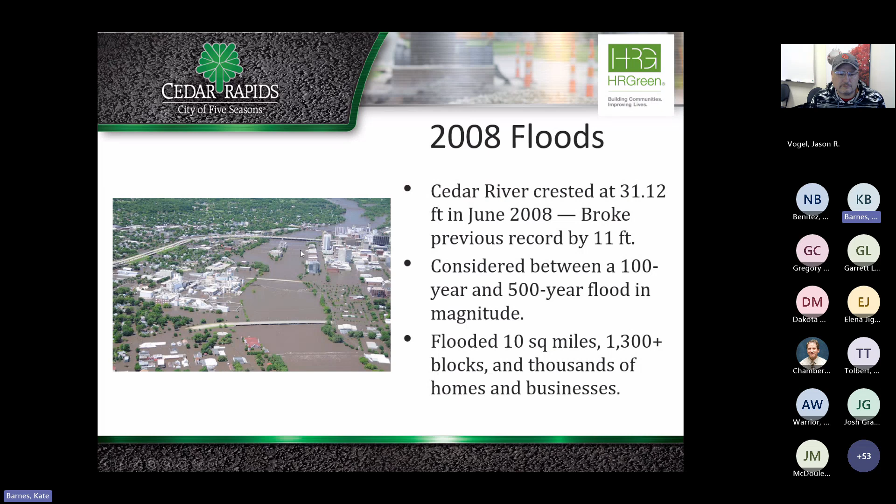It displaced anywhere from 10,000 to 18,000 residents and was declared a major federal disaster with an estimated $10 billion in damages. At the time, that was one of the nation's largest events damage-wise.

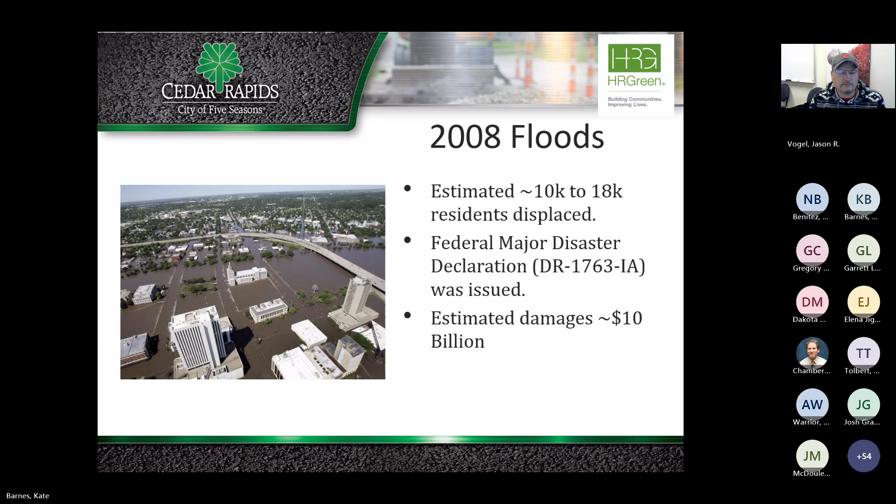This is a picture of downtown Cedar Rapids. It was completely flooded. But the city decided to move quickly, and they put together a long-term flood management strategy within just 5 months of this event happening.

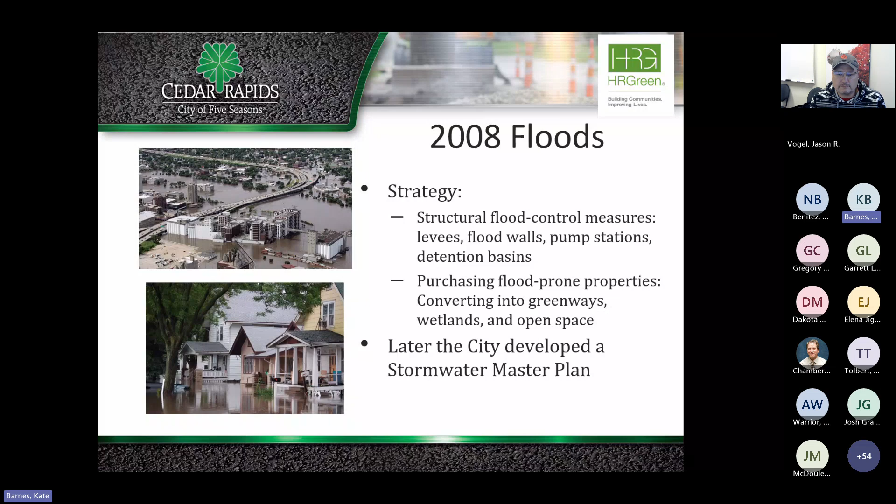Their strategy included structural flood control measures, so levees, flood walls, pump stations, and detention basins, but also converting flood-prone properties to greenways, wetlands, and open space. The city also developed the Stormwater Master Plan because of these floods.

This Stormwater Master Plan was actually done by a different firm called HDR, and they modeled the entire city of Cedar Rapids hydraulically with a 1D, 2D model.

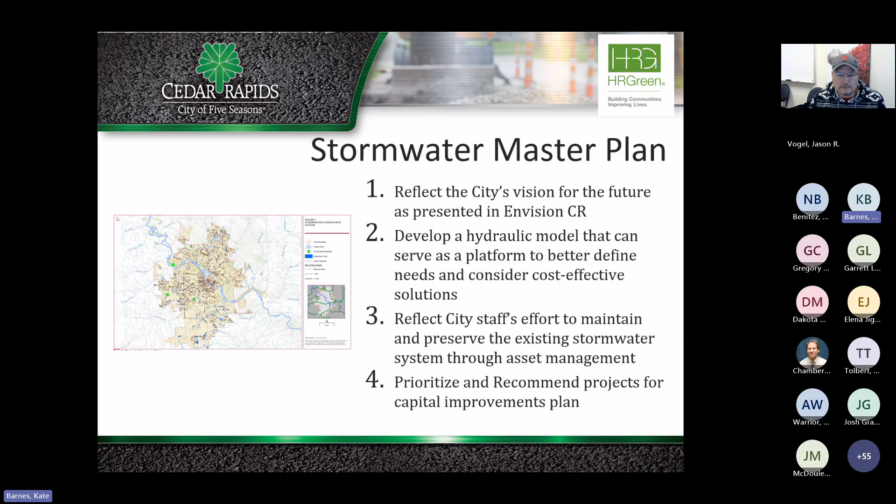This is a screen grab of the modeling extents, but what the Stormwater Master Plan set out to do was reflect the city's vision for the future as presented in a document called Envision CR, develop a hydraulic model that served as a platform to better define needs and consider cost-effective solutions, reflect the city staff's effort to maintain and preserve the existing stormwater system through asset management, and then prioritize and recommend projects for capital improvement plans.

Also, the study aimed to identify financial needs and potential funding to close the gap between revenue and needs, consider potential policy solutions to address fundamental issues that contribute to current flooding problems, and establish the foundation for annual updates to expand and improve upon the initial plan.

So they really did a lot of work modeling the whole city and determining areas where upgrades were needed and prioritizing those upgrades based on available funding.

This image is actually the watershed where the project that we're going to talk about today is. It's right here, on the west side of the Cedar River.

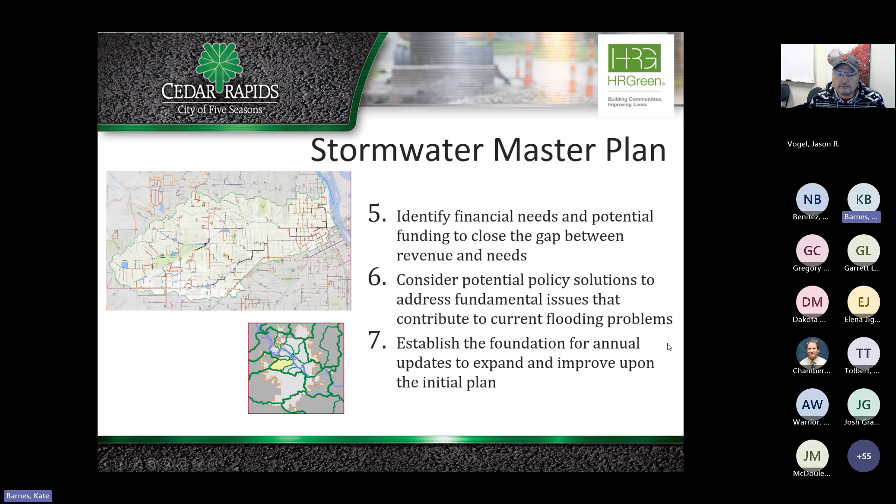Another part of what came of these floods was a flood control system. The city is still actively designing and constructing their flood control system. The green are areas of the levee that are complete. The red is areas where active construction is taking place, and the blue are future construction areas.

You'll notice that the top of this page, which is actually the east side of the river, is more complete than the west side of the river. That's because this is the downtown area of Cedar Rapids, and this side of the river received federal funding, so they needed to complete that work quicker than the west side. But the city does plan to do both sides of the river; they just needed to complete the east side first.

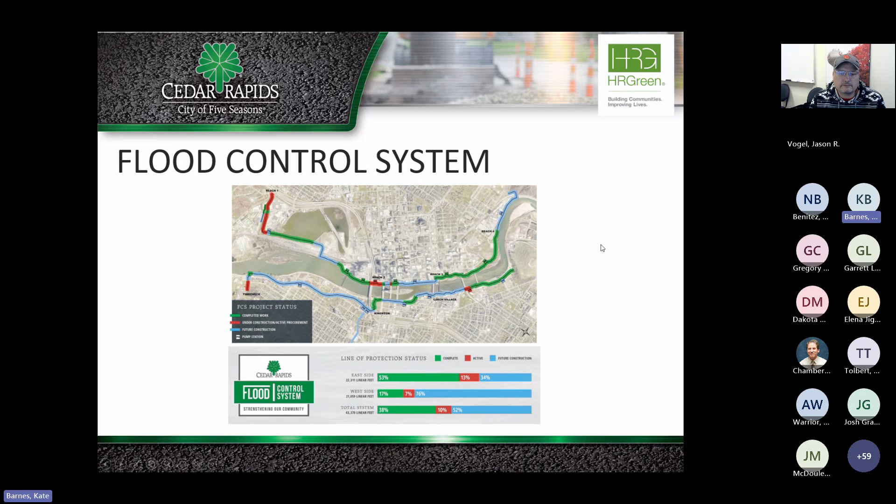So now I'll talk a little bit about where the project is located. This is along an area called the Vinton Ditch. Along with the 2008 floods, record 2014 flood events happened.

Along the Vinton Ditch, and that really established a need to kind of get this project kicked off. So the city put together plans for a basin along E Avenue, and they called out their city stormwater master plan.

There was a lot of discussion about traditional versus, as we call it here in Iowa, the unified sizing criteria, for stormwater detention. The E Avenue basin approach was they wanted to implement both water quality and quantity into the project.

Eventually this area will be protected by a levee, so there will need to be a pump station for flood events to get this water out from the drainage area to the Cedar River.

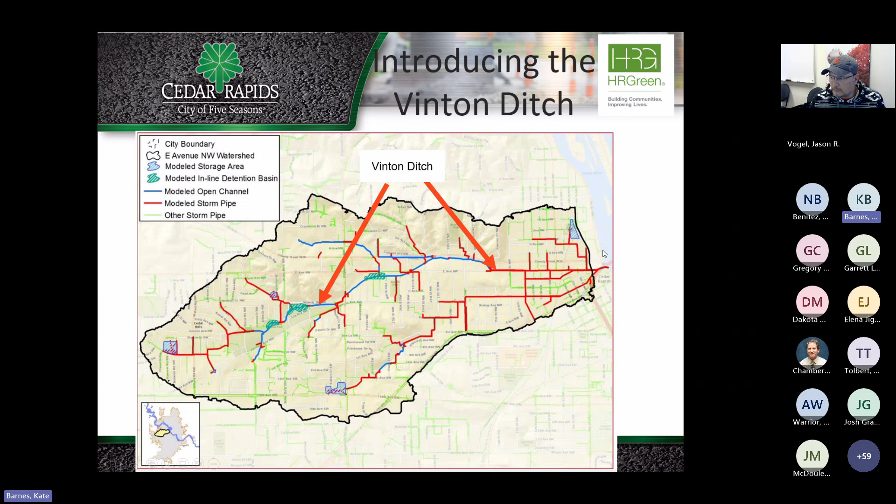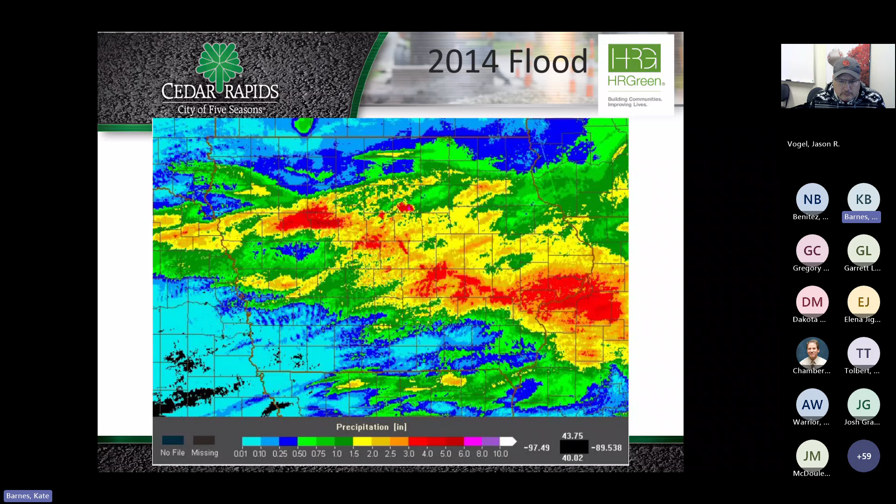Here is the 2014 event that also happened. We're right here. So not only did we just have the 2008 floods, but we also had the 2014 floods, and around the project there was significant flooding in the neighborhood.

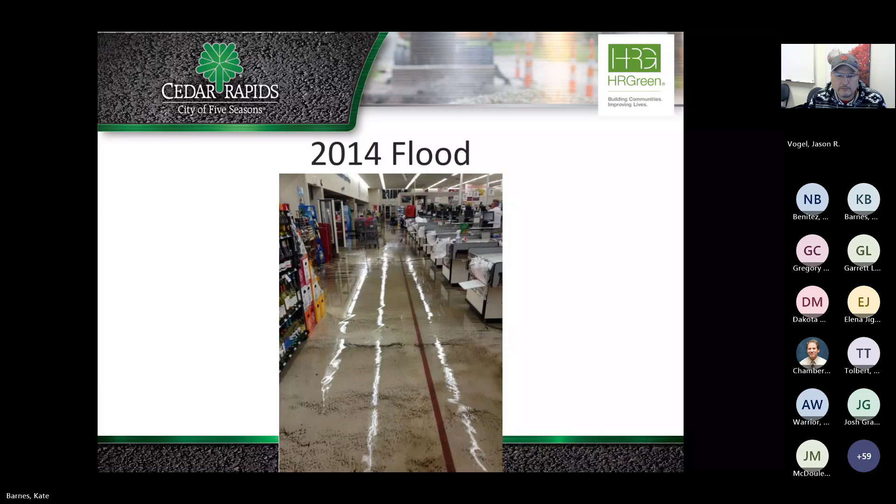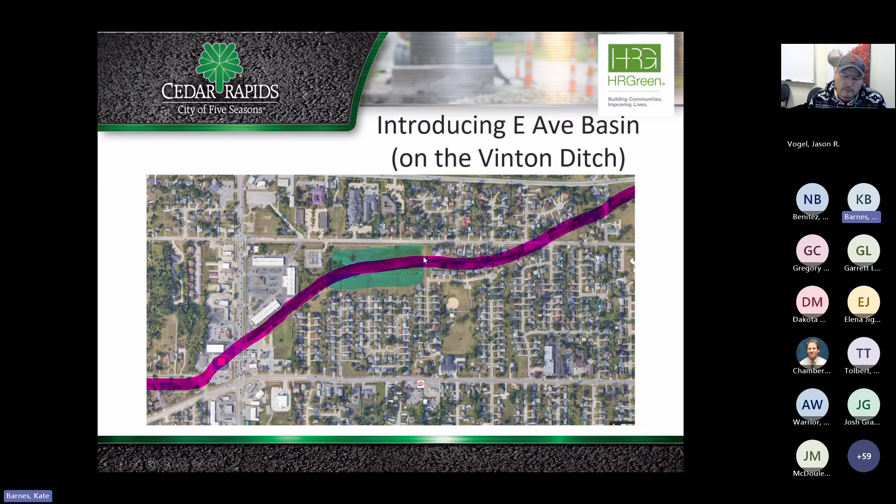Our project site is along the Vinton Ditch, and what we wanted to do was expand upon the idea of just traditional detention to help reduce some of those flows. So these are some pictures of the existing basin.

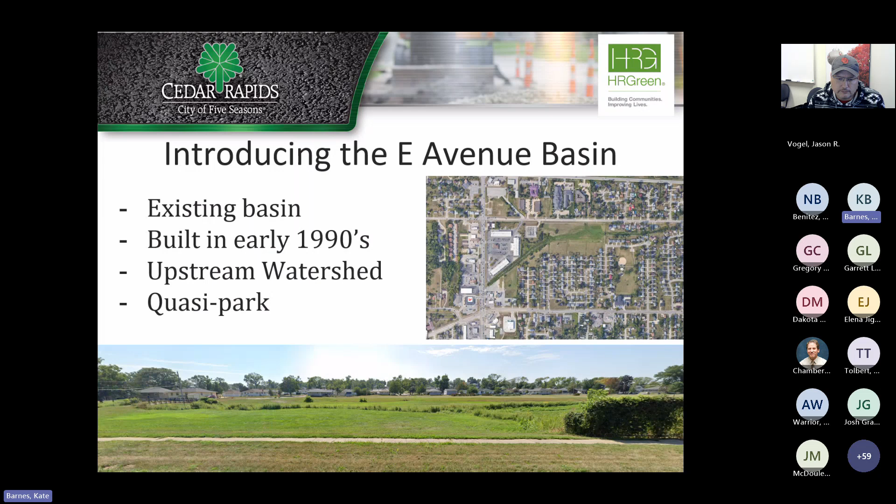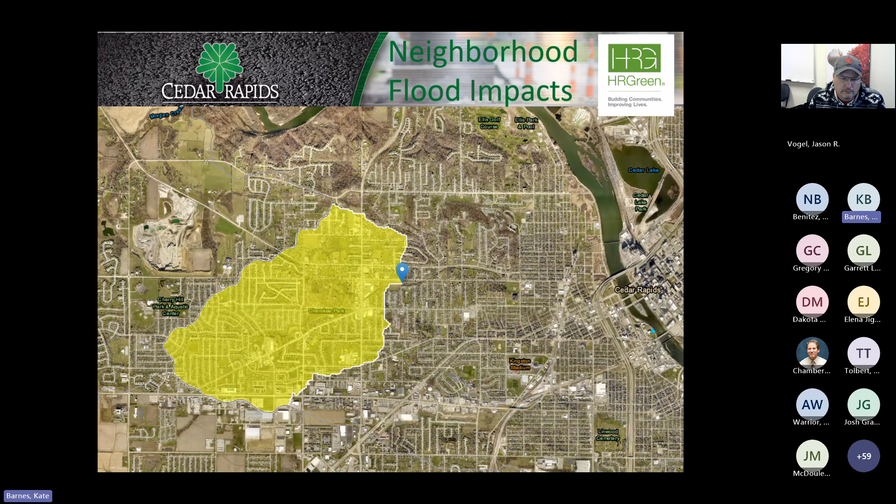You'll see essentially just a channel. It was built in the early 1990s, and it serves the upstream watershed, and also somewhat serves as a park to local residents. There's not really anything but an open grass area and a sidewalk surrounding it, so it's not like a traditional park, just a park space. The watershed is about half of the area I showed previously from the Stormwater Management Plan. It's also located in a FEMA flood zone and floodway.

In the Stormwater Management Plan, what was really being highlighted was where are places in the watershed that we can put detention and try to reduce flows going to the Cedar River, because what we want to do is decrease the size of the pumps needed for any sort of interior drainage during flood stage. So they called out the area: let's put a basin along E Avenue, and we'll use that to decrease flows.

When we talk about different types of detention, traditionally we're looking at just the 100-year event, but Iowa recently, within the past 10 years, adopted what they call the unified sizing criteria. So we're looking at basically a wide range of storms, and we want to treat all of those storms because we get different benefits from treating the different storms.

The smallest of the storms we call the recharge volume, or recharge storm. These would be rain events that are small, that we want to infiltrate everything back into the ground. Our water quality event - I'm not sure how this works for all the states in the Great Plains, but at least for Iowa, we try to treat the 1.25-inch storm, and this captures about 90% of all storms that happen in Iowa.

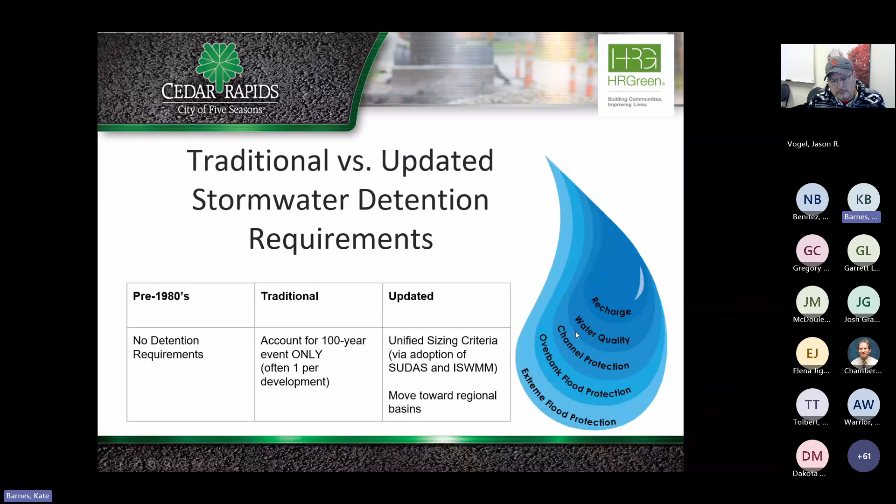So if we look at traditional versus the updated stormwater detention requirements - this is a screen grab of an area in Iowa that was developed prior to the 1980s, where there were no detention requirements. And then if you look at more current developed areas, we have a lot more detention, but all of these detention areas are sized only for the 100-year storm, reducing that down to what's called the pre-developed 5-year event. So basically we tried to reduce our 100-year proposed flows down to the pre-development 5-year.

And beyond that, the unified sizing criteria - which we don't really have screen grabs of recently developed areas for - would be detaining even more than just that 100-year event.

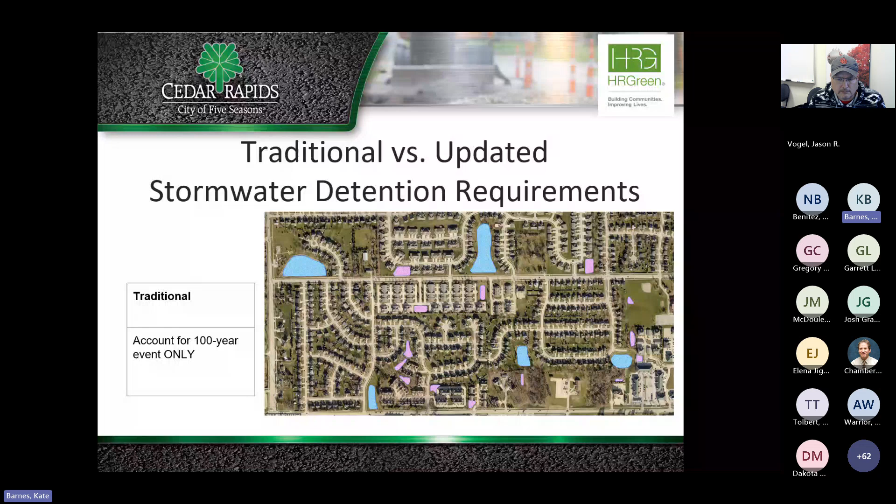This illustrates what the outfall structure for the unified sizing criteria might look like. We have a multi-stage outlet structure - it basically has a treatment level, and then the water quality, channel protection, overbank, and extreme flood events have different outlets that are sized appropriately so the different rainfall events can travel through the outlet structure.

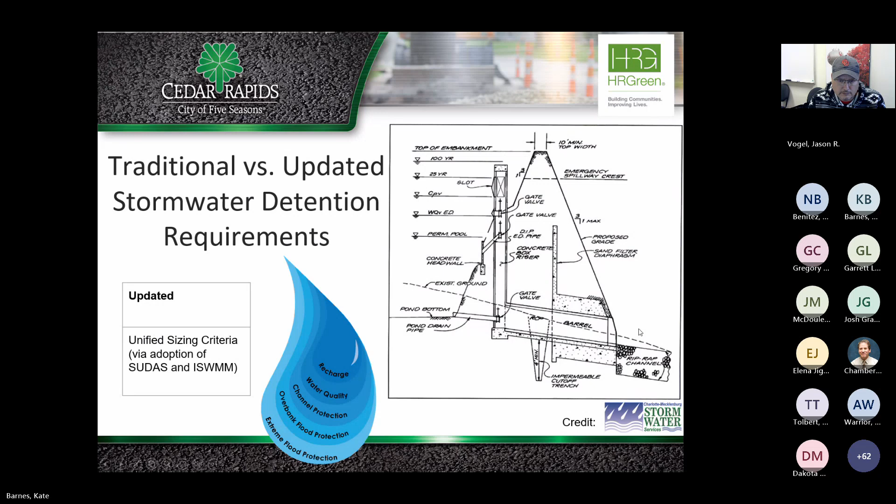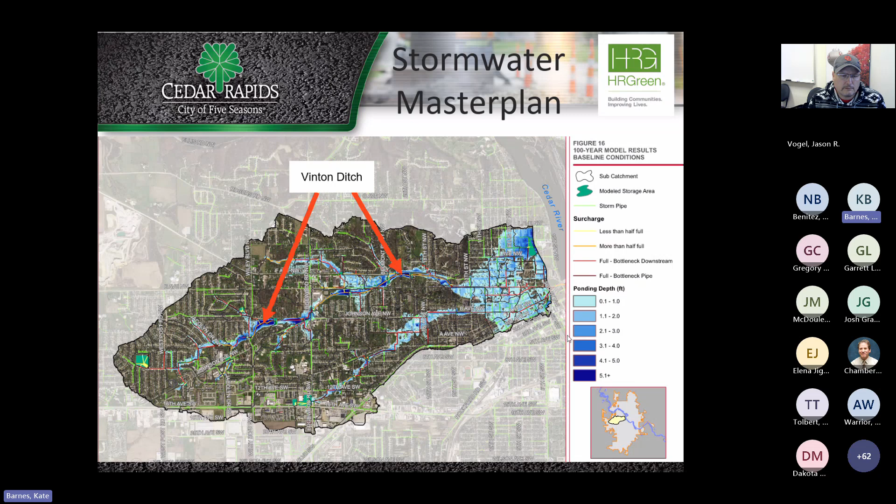And how this applies to the Vinton Ditch: the area where our project is located is right here in the middle of the watershed. When the Stormwater Management Plan was developed, the idea was let's just try to do traditional detention and hold back as much water as we can to prevent water from inundating during flood events. This image shows what the current system would look like if there was an event where pumping would happen - all of this area is inundated.

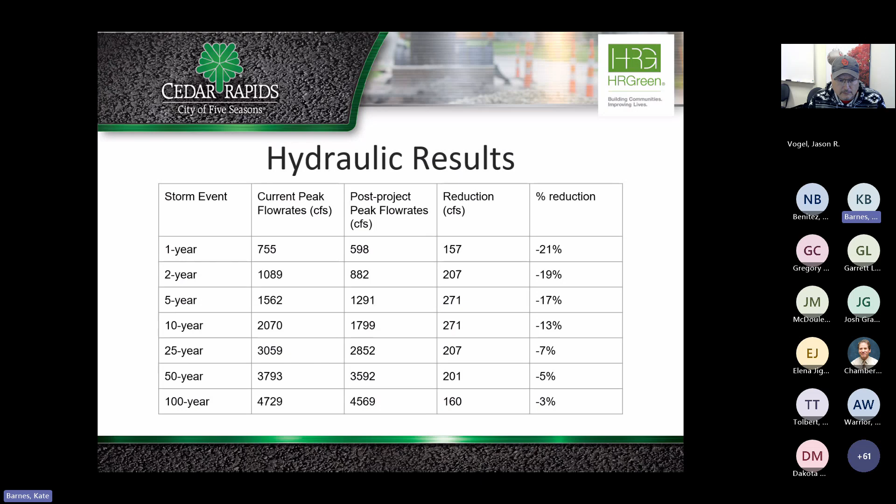What we looked at is, could we update this design to a different design that incorporated treating some of those lower storms, but also still reducing peak flows? So we created a hydraulic model of our own to show if we modified the design from traditional detention to one that incorporated water quality features, could we still get peak flow reductions similar to or more than what was outlined in the Stormwater Master Plan? Here's a quick chart of the flows we were able to obtain with our modeling.

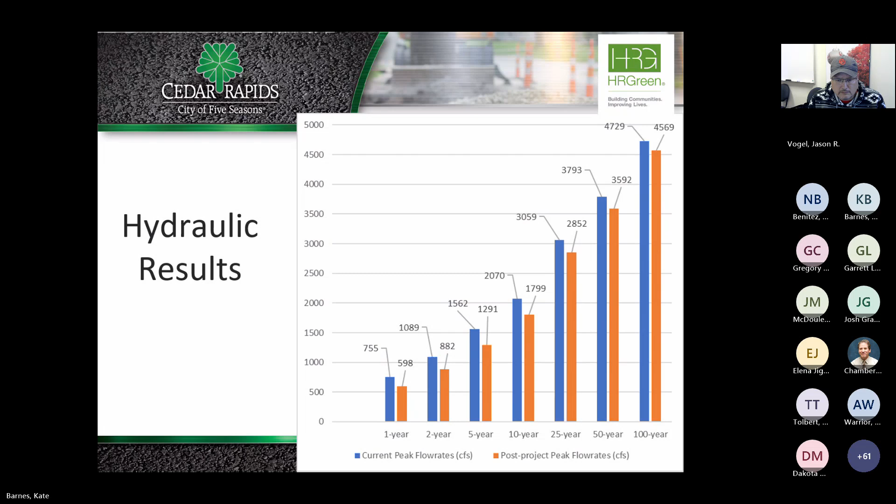When we went into the design of the site, we were looking at local flood mitigation. We want to have less of an impact on the neighborhood. We also want to assist with the city's flood control system and make necessary civil engineering improvements to the water main and sanitary sewer while we were in the area, and then also improve the transportation in the area and provide the ecological uplift and water quality uplift, as well as provide some connection to local trails.

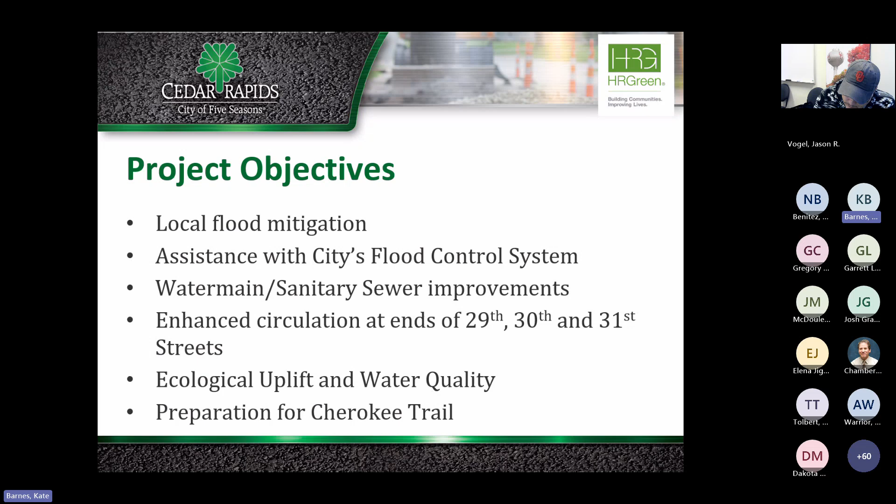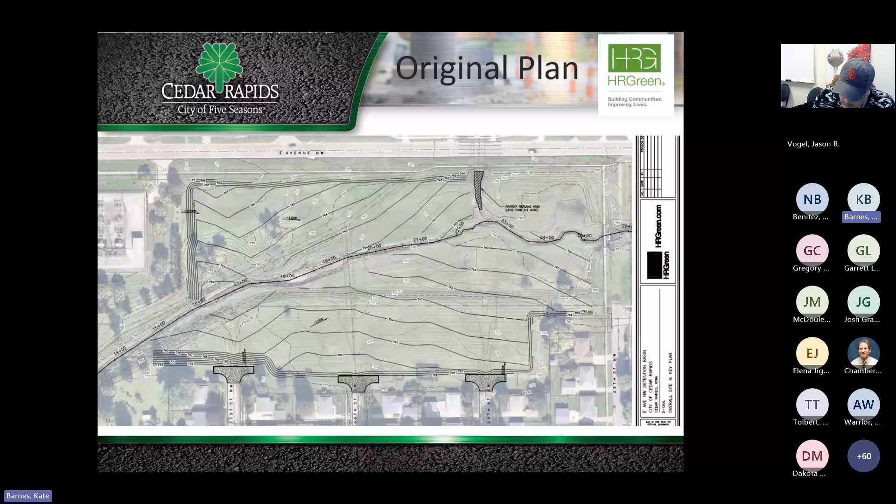This was the original design for the basin, just purely based on the Stormwater Management Plan. We're going to do some grading. We're going to try to open up the area and provide as much detention as we can.

This is the final design of what our site looked like. We ended up incorporating 5 oxbow wetlands into the detention basin. Our original footprint was in this area, but we created several low spots for detention of those lower storm events, and also pocket wetlands that will remain beyond just the storm event.

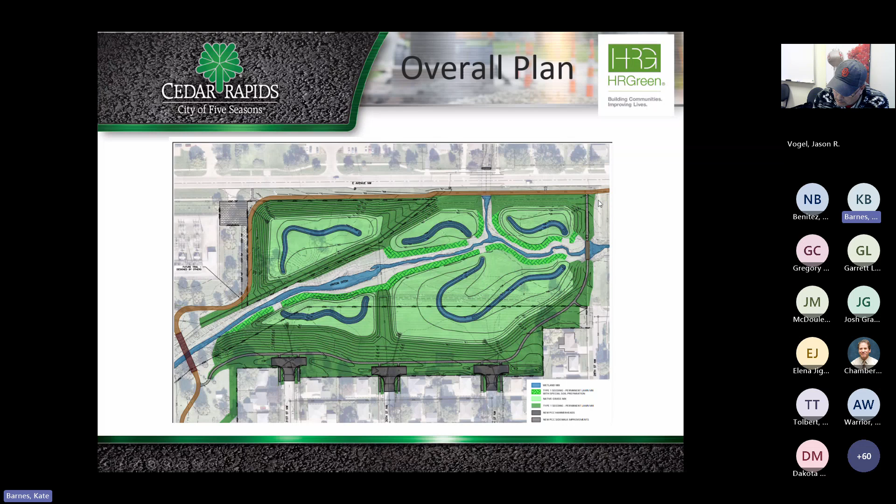Our site also included connection to this proposed future Cherokee Trail and additional sidewalk around the whole park area, as well as hammerhead turnarounds to make the neighborhood safer for emergency management, and modifications to the trail bridge weir so we could control some of the flows leaving the site.

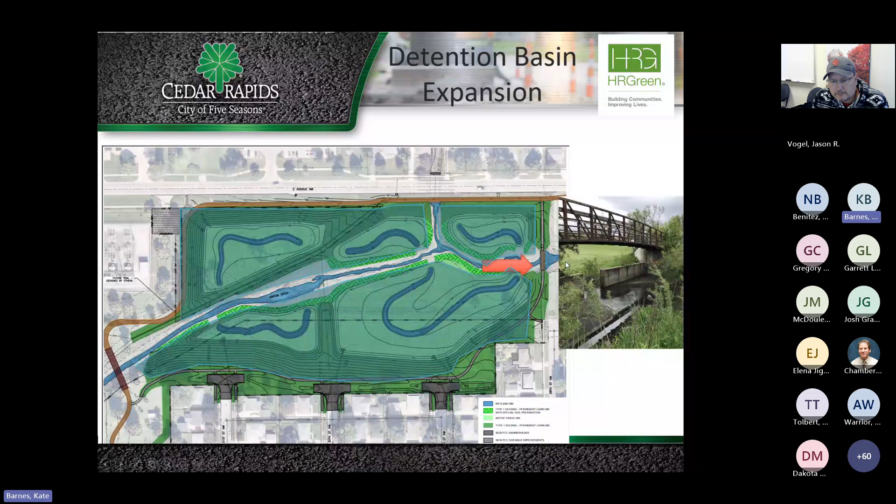So this is the existing weir that we have on site, and this was a lot of our modeling was determining how could we model and change this weir to maximize some of the potential for detention on site.

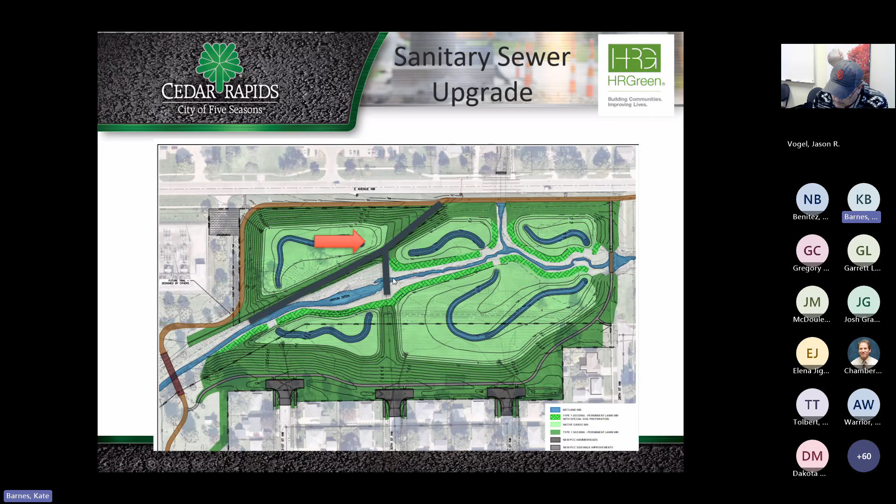We also had improvements to the sanitary sewer system running through the site, as well as improvements to the water main, that's what I discussed previously. We put in a trail.

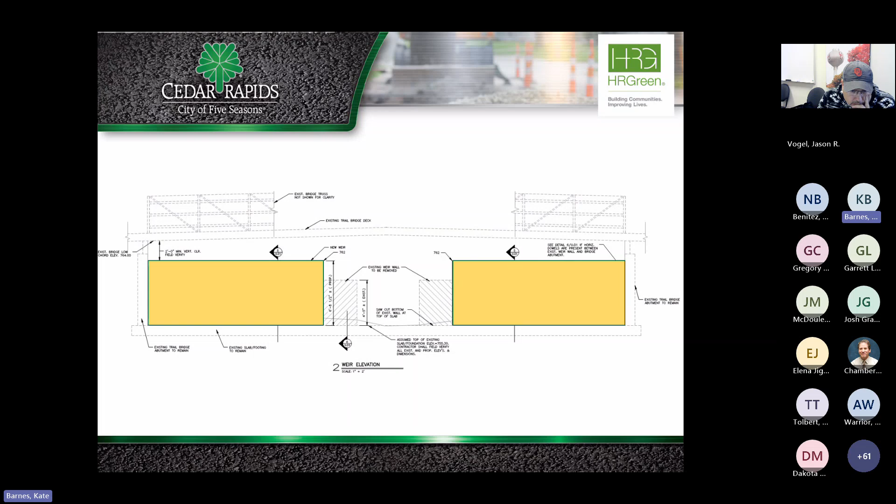And what we ended up coming up with was a wider weir with a little bit higher of a weir detention storage volume.

So the oxbows themselves really cut into the existing grade and provide a lot of additional storage, but with these oxbow flow paths that provide wetland habitat.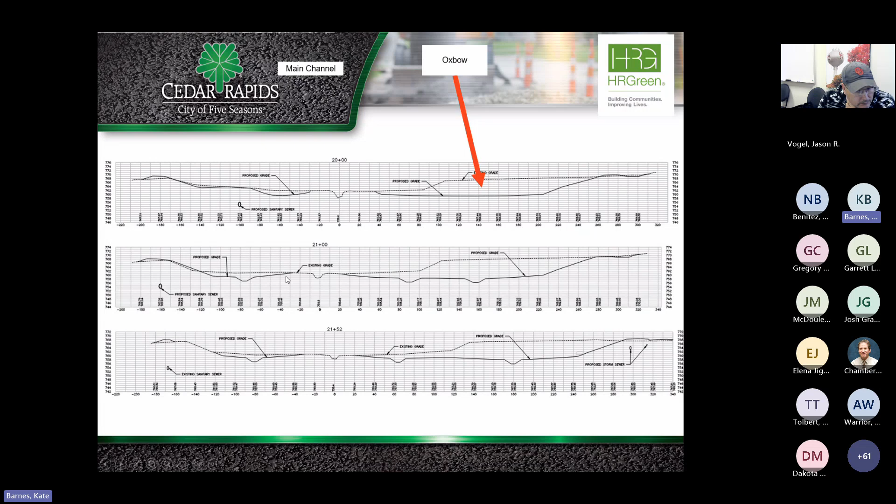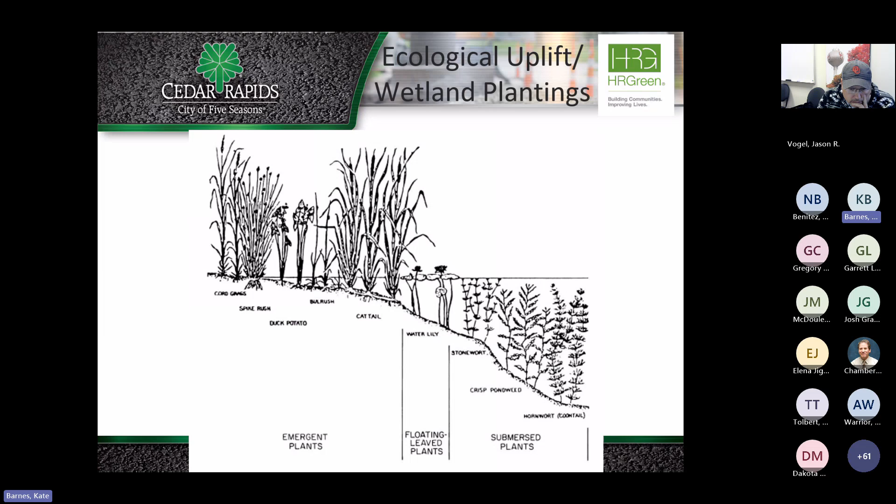We used a mix of native wetland plants from Iowa so that we could have really good ecological uplift on the site and have some of the water infiltrate back into the site. These are some photos of the different types of wetland plants that we used.

And our planting plan: within the oxbows themselves, we use the wetland mix, which we've had success with. Iowa sets out different seed mixes that are successful through our urban drainage specifications. And then within the detention area that would just be seasonally wet, shouldn't stay wet all the time, we put a native grass mix.

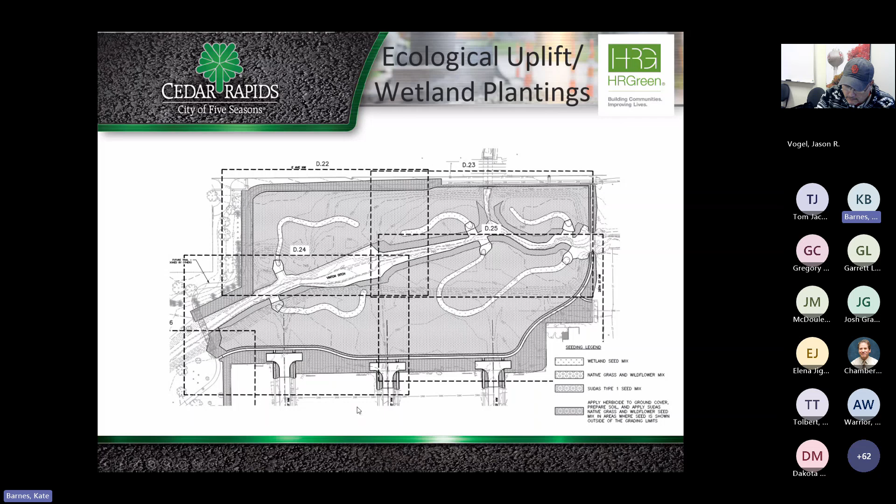And then along the border of the project itself, we put just regular grass. We call it type 1 seed mix. This was actually our funding agency's requirement, to put a border of regular grass around the site because there was a fear of any future fires. They wanted basically a border to protect the neighborhood from any potential grass fires, which I thought was really interesting because we don't get a lot of grass fires in Iowa.

The project itself received some funding from the FEMA disaster funding, as well as IDALS Water Quality Initiative funding. This is a program in Iowa that you can apply for funding up to $150,000 with a 50% match. And then also it was funded by the city.

We think the project was a good project for the neighborhood because it provided local flood mitigation, but it also reduced the size of the pump station needed as part of the Cedar River flood control system. So because we were able to lower some of those flows for the lower storms that pump is designed for, we could decrease the size of the pump needed and save the city quite a bit of money downstream, while also providing that ecological uplift.

So the original design for the basin would have reduced those flows at the flood control system, but it wouldn't have provided any of the water quality or native features that our current design had.

So we are seeing water quality improvement and increased pedestrian amenities. Iowa has really good trail networks—you can bike almost across the whole state. We're very interconnected from city to city with our trails, and we were able to connect two major trail systems with this project while providing natural habitat.

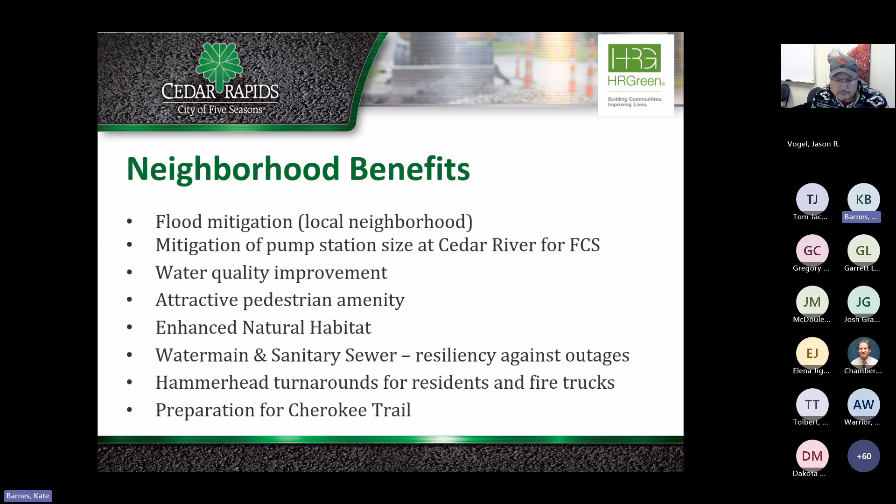The local neighborhood was really excited about the project because they were going to have a more pretty, scenic area. They were already walking in the grassed area, so now they'll have a trail to walk around the park. We also improved the water main and sanitary system, and improved the safety of the neighborhood with hammerhead turnarounds for residents and fire trucks. That was seen as a benefit to the project as well.

That did not take as long as I thought it would, but I'm open to any questions anyone has about the project, any further details, or any questions in general.

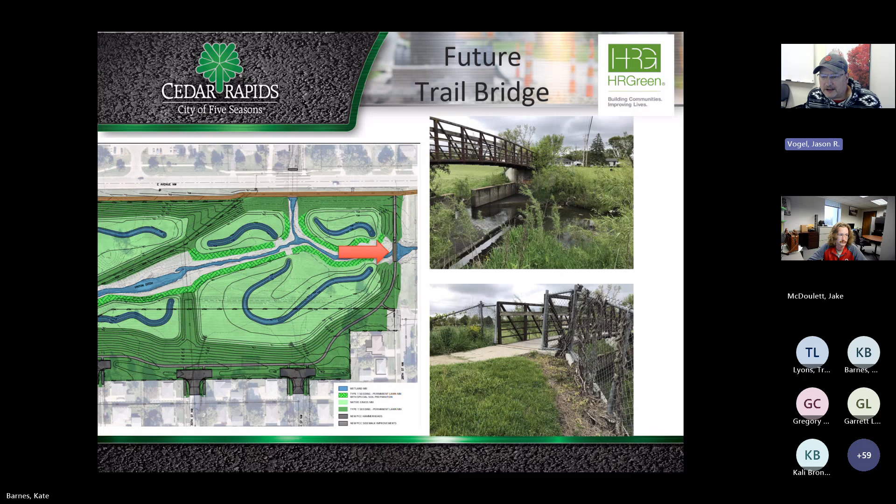Good. Miranda Penn is asking, my apologies, I only caught half of the funding slide. What were the funding sources? We had some funding from FEMA, and then also from IDALS, the Water Quality Initiative funding, and then the city also contributed. And IDALS is Iowa? Yeah, Iowa Department of Agriculture and Land Stewardship, sorry. No worries.

Okay, Juliana Manott is asking, with properties being in the floodway, is there a program to do any buyouts of repeat flood properties, possibly turn them into storage? Yes. This came through that stormwater management plan for the city. The two strategies they had were, let's provide some structural relief for flooding, i.e. levees, detention basins, but also here's our list of all the properties that are within the floodplain and experience recurring flooding. And the city is working with landowners to purchase those properties and turn them into green space.

They are very good at keeping track of those properties and working with property owners for specific needs. Like there's one parcel in town that they want to purchase, but the landowner said, I don't want to sell it until my son graduates from high school. So they're coming back to that property owner in a couple years when their kids are all out of the house, and they keep track of it really well.

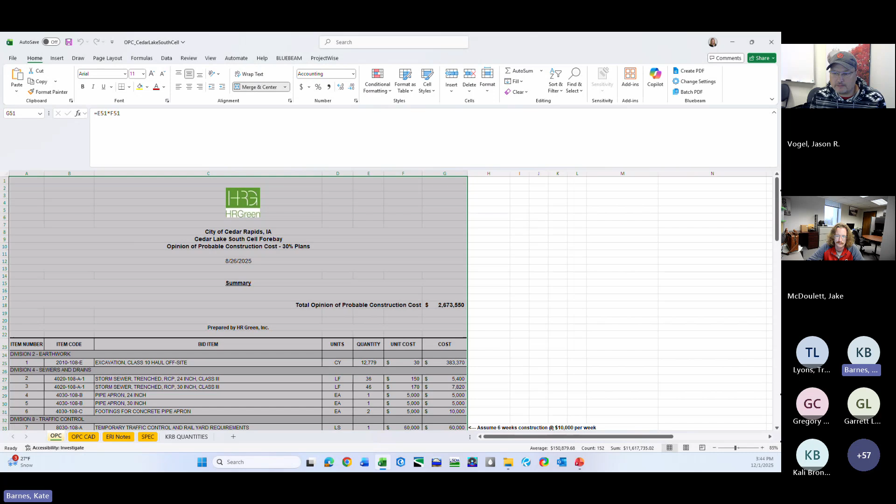Mary is asking, I may have missed it, but what H&H model was used to design the basin? We had a mix of models. We used XP SWMM for the overall system modeling to see how the weir would affect the downstream system, but then we also used HEC-RAS because we had to get a no-rise certification from the Iowa Department of Natural Resources for floodplain permitting since we were in the floodway and flood zone.

I don't have exact construction costs, but our estimate, and I think we came a little bit below estimate, was 2.6 million. And that's for everything.

Great. I apologize if I pronounced his name wrong. Sami Khalil is asking, what were the main drivers that led Cedar Rapids to shift from traditional detention-only approaches towards multi-benefit stormwater solutions? I don't know if I can speak for the city, but the state of Iowa about 10 years ago pushed out the unified sizing criteria, and it's not required in every single city, but it gives you a good roadmap of how you can do more than just traditional stormwater management.